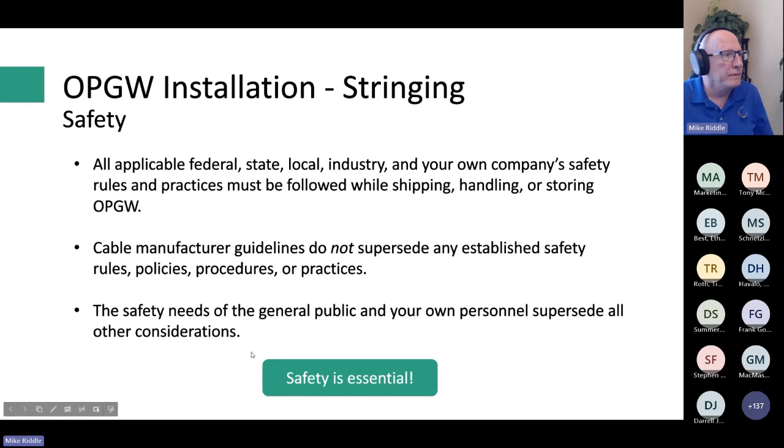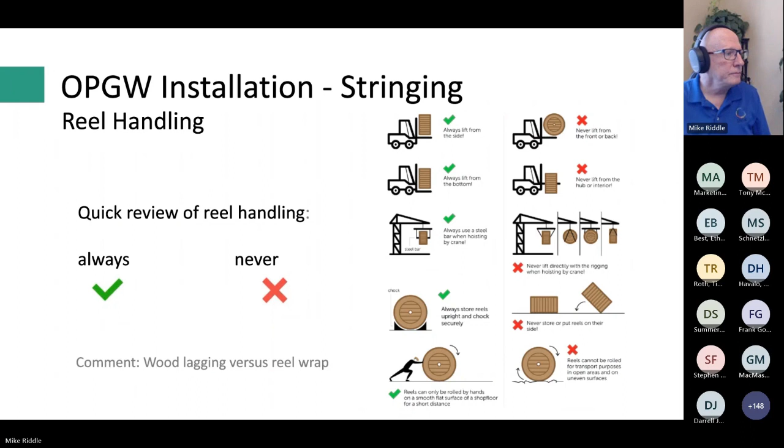So again, before you even begin the actual stringing, it's good practice to check the pull, because this is your last chance to make sure there was not some kind of potential problem. The general guideline for pulling in OPGW, and really this applies to other types of cable as well, but today our topic is OPGW, so I'm applying it specifically to OPGW, is 20% of the rated breaking strength of the cable. That's in the IEEE 524 standard, which is the standard for installing aerial cables, and it's the value that we use as well, 20% rated breaking strength. But you do need to check this, because some suppliers will only allow 15% rated breaking strength or less. I've seen 10.

If you exceed what the manufacturer is recommending, you risk voiding the warranty on your cable if something goes wrong. So that's your risk there. It's worth it to check it.

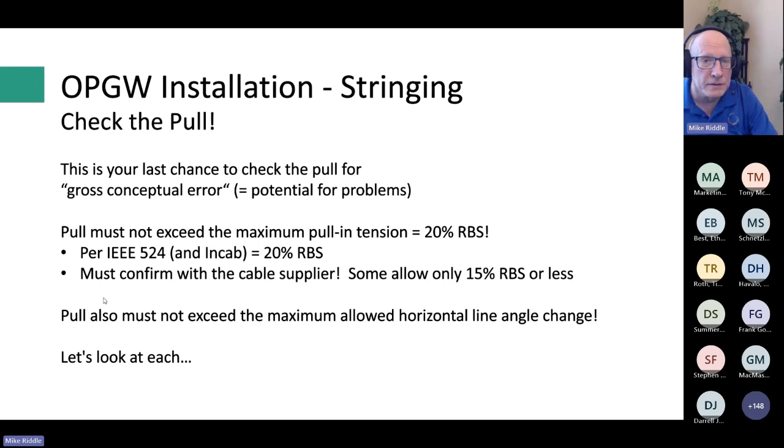We also think you should check the horizontal line angle changes, and we'll show how to do both of these. First, in order to do that, you need to know the rated breaking strength of the cable, and you're going to get that from the cable data sheet. This is one of our data sheets, but every manufacturer is going to have a data sheet on their cable, and you will find the rated breaking strength on it. If you don't have the data sheet, you need to get it from the cable manufacturer.

Later, we're going to see that the cable diameter is going to be a factor as well. So for stringing purposes, these are the two overwhelmingly most important things you need to know: the cable diameter and the cable rated breaking strength. So how do you check that?

In general, the tension at the payoff, from the reel, is going to be about half your design tension at 60 degrees Fahrenheit under initial unloaded conditions, what people often refer to as everyday conditions. Then the tension on the pulling side is going to be that tension divided by 0.98 raised to the n, where n is the number of structures you're going through.

So what does all of this mean? Well, this 0.98 raised to the n is allowing for the fact that each stringing block is going to add a little bit of friction to the pull. I'll use the term stringing block most of the time, but there's also sheave, pulley, traveler — different terms that all mean the same thing: the wheels that you're pulling the cable over as you pull it in during the stringing process. Each one of those adds a little bit of friction to the pull.

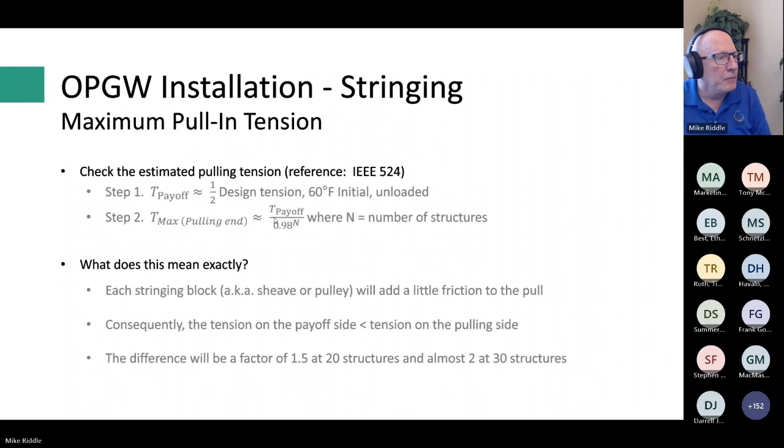As an example to illustrate this point: if I had a 19,500 foot pull going through 30 structures, and the cable rated breaking strength was 20,000 pounds with a design tension of 3,000 pounds, I would expect the tension at the payoff to be about 1,500 pounds — might be a little more, might be a little less. The estimated maximum tension using the formula on the previous slide: 0.98 raised to the n works out to 1.8. So 1.8 times 1,500 equals 2,700 pounds.

20% of my rated breaking strength was 4,000 pounds. 2,700 is less than 4,000, so you're okay.

Now, this is approximate. So what if this came out to 3,900 pounds? Well, you might want to be more careful because it's only an estimate — might be a little bit more, might be a little bit less. Just know that if it was 4,100 pounds, I wouldn't necessarily say you can't complete this pull. I'd say you need to talk to the manufacturer and be very careful during that pull. So it's a guideline, not some kind of law of nature.

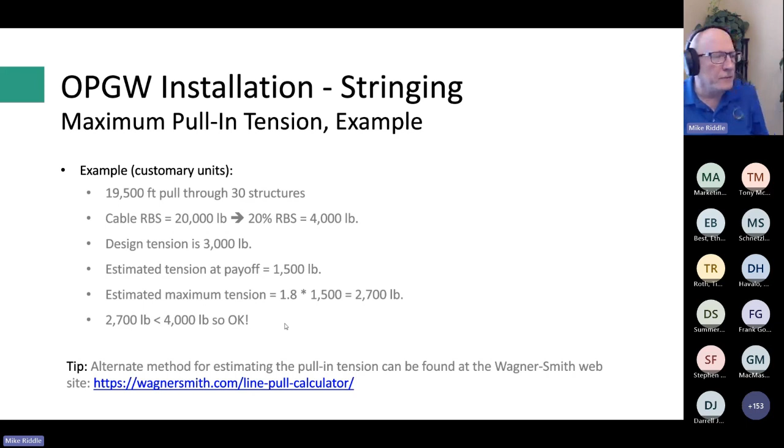Another way that comes at this from a slightly different angle but basically ends up in the same place: Wagner Smith has a line pull calculator on their website. You'll use slightly different information, but you end up in a very similar place as far as estimating what the maximum pulling tension is going to be.

And then I just want to repeat this for the metric units for our international customers. I won't actually read through this — just know that this is available if you want to look at the slides later and check the math and whatnot. Okay, so we'll keep going.

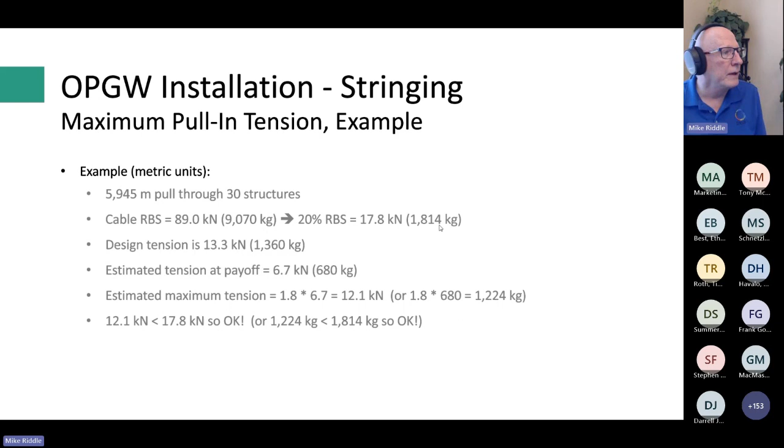I mentioned also that you want to check the horizontal line angle change. Our guidelines are for plain center stainless steel loose tube type cables, aluminum clad stainless steel loose tube type cables, and aluminum pipe type cables — basically any cable where the fiber is actually in the center of the cable. You want to limit your total horizontal line angle change to less than 270 degrees, of which only one can be more than 90 degrees.

For a stranded stainless steel loose tube type cable, you can go up to 360 degrees, of which two can be greater than 90. You can ignore angles less than 5 degrees. This too is another example of something that is a guideline, not a law. You need to check with other suppliers because they might be more restrictive, meaning these numbers might be lower, or they could be less restrictive.

To illustrate this, if I had a line using a type S cable with 10 degree angles, 10 times 10 is 100, that's less than 360, no problem. So that's the concept, you just total up the angles. You don't need to make a distinction between angles to the left and angles to the right. Just use the absolute value of the angles, add it all up, and follow these guidelines.

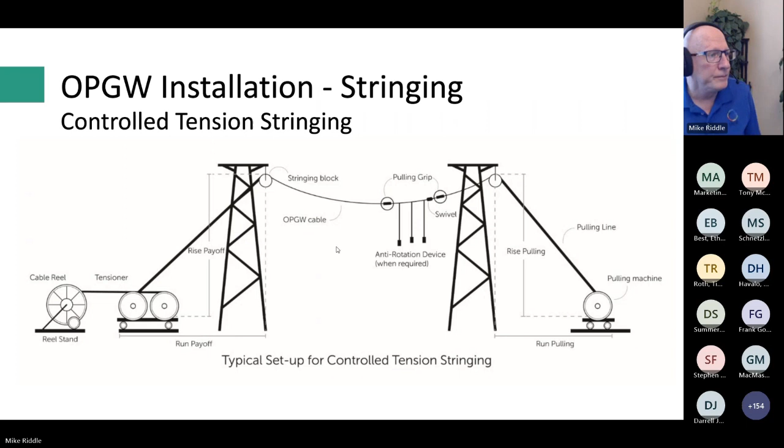I do tell people to use the mental, I emphasize mental, bloody hand test, because remember, we're about safety here. So you don't want to do this for real, you just want to use your mind to imagine that if you put your hand in the groove and that bull wheel was spinning, if you think your hand would end up bloody, then that's a tensioner not to use. You want your hand to come out clean, maybe a little dusty, but basically no blood. That's the point, but again, it's a mental test only.

We're also going to talk about the effect of lay direction, because in the United States and many countries, OPGW is made with left-hand lay, whereas conductor is made with right-hand lay. I just realized I should have had a slide to illustrate that.

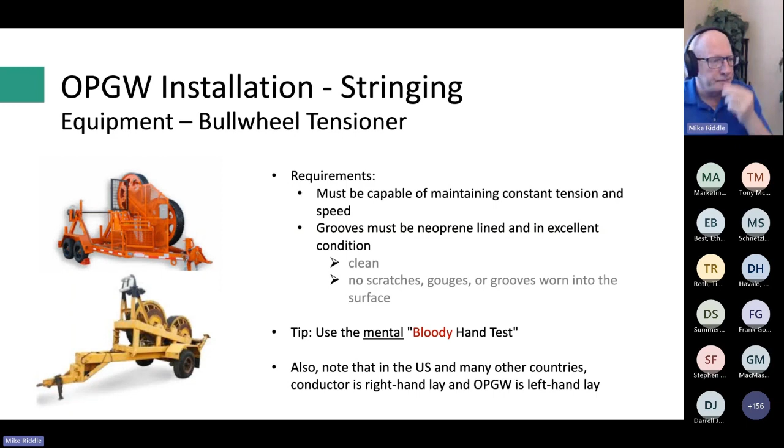But anyway, the point is that conductors in all countries are different from OPGW, they're the opposite. So outside the United States, you'll see conductor left-hand lay and OPGW right-hand lay. So in theory, here I'm illustrating right-hand lay conductor. The reeving of those bull wheels would be like you see here in this picture, left to right.

And notice the offset here. The back set of wheels versus the front set of wheels, there's a shift. Those front set are shifted to the left relative to the back.

So in theory you should change that from conductor to OPGW. Instead of going from conductor left to right, you should go right to left. Reading left to right, I wrote this wrong - offset to the right. Yeah, I made a mistake there. I should have said you should go right to left, and then the offset should be to the right. That part is correct.

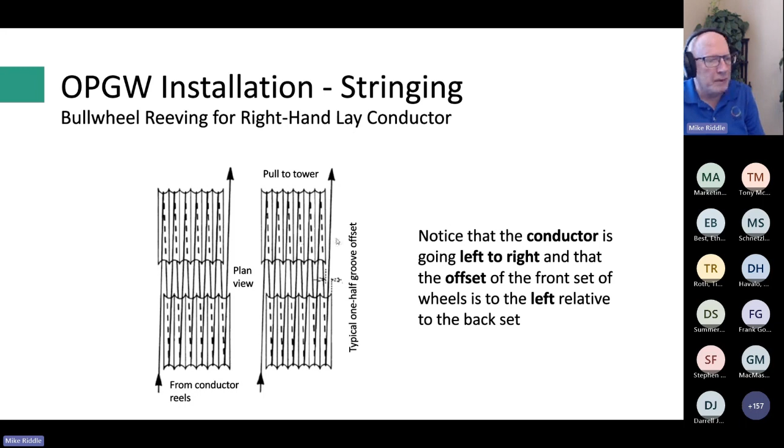And the reason you do that is that in theory you could get de-stranding, or think of it as unraveling - it's often called in our industry bird caging. So the outer strands could loosen up.

But we run into reality. In my experience, which is now going on close to 30 years, I've seen around 50% of tensioners, maybe more, where it's not possible or practical to reeve in the opposite direction. Sometimes you can't physically change the offset. Sometimes just the way it's laid out with the cable guides on the tensioner, you couldn't reeve it the opposite way. And in many cases, I've just seen the requirement is overlooked - the crew doesn't know that you're supposed to change it.

So I observed that over the course of my career, and I realized I've never seen an actual problem caused by the incorrect reeving or offset. I don't know why. It's one of these theoretical things, but I don't really see it in the field. It could be because of the materials used - aluminum clad steel and aluminum alloy wires used on the outer layer of OPGW.

They're stiffer than the type of aluminum that's used on conductor. So because they're less ductile, maybe they're less susceptible to unraveling or bird caging during stringing. But even on long pulls, I've never actually seen a problem from this.

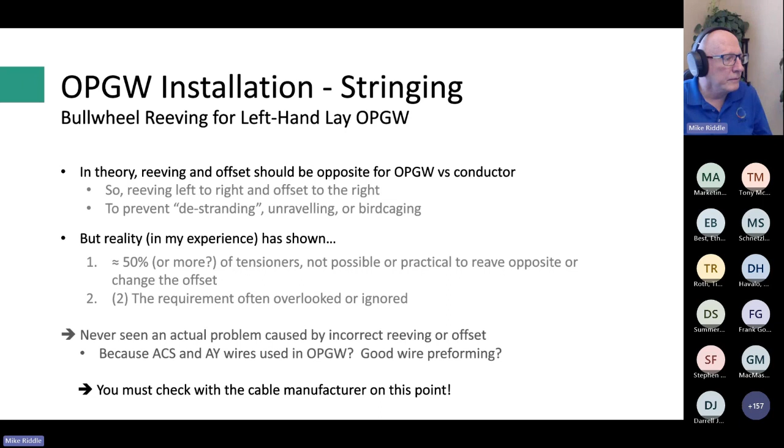You want the axle and the braking mechanism to be such that the cable will rotate smoothly. One of the things you're going to hear throughout this presentation is how important smooth is. You don't want the cable jerking around. You don't want the reel to free spin. So if the pull comes to a stop for any reason, you don't want the reel to keep spinning, because what's going to happen? The cable is going to loosen up.

If it loosens up too much, you can have a big problem. If it's only one or two wraps, maybe not a big deal. But if it's an entire layer, you're asking for trouble.

In order for it not to free spin, you should be able to get a little bit of back tension. Now, I've never seen a piece of equipment where you could actually measure that. People want to know, well, how much back tension? Well, 50 to 100 pounds. Okay, but how can you measure that? Well, you can't. So the reality is it boils down to hand tight.

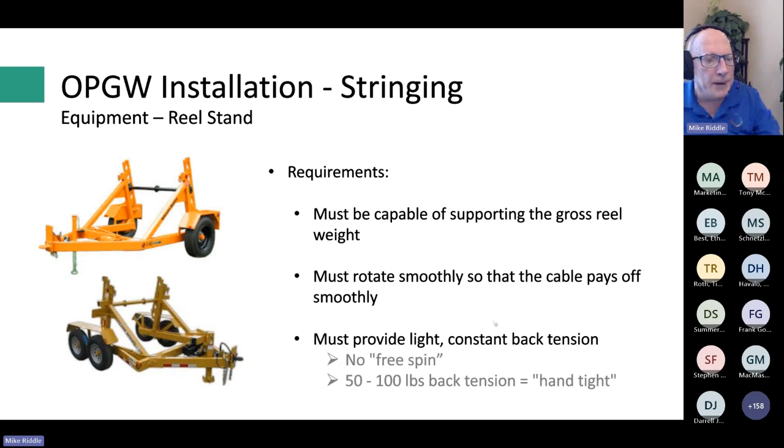Next up, the puller. The puller needs to have sufficient working capacity for the pull, so you've done that calculation of what the maximum pull is, and you want to make sure it's got that capability.

If you're looking at a pull that's going to require 3,000 pounds, then your puller needs to be capable of pulling 3,000 pounds. It's that simple. Also, you want to make sure the drum has the volume for the pulling line you'll be taking out as part of this process.

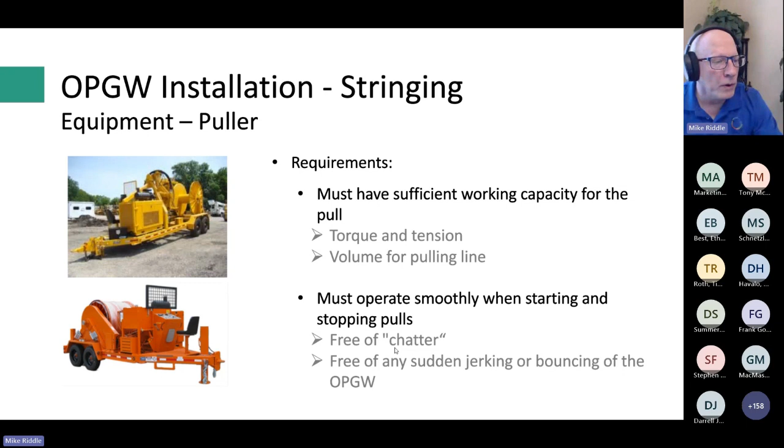And you want it to have good torque, so that's going to help make it smooth. You want it to operate smoothly when it starts and stops the pull. You don't want chatter, like it's jerking or working hard to get going. You want smooth.

So you had to connect the OPGW to a pulling rope. Let's talk about that. You want a good quality braided pulling rope or pulling line, close to the diameter of your OPGW, reasonably close. Obviously, sufficient strength matching the conditions of the pull. There's so-called uniline out there with no torque, and that's what works best—a no-torque type pulling rope.

I get this question asked a lot: what about using an existing shield wire to pull in OPGW? You can do that, but you need to carefully inspect it before the pull. These days, drones are a great way of assessing the condition of an existing ground wire you want to use to pull in another cable.

But there's also assessment equipment available. Kinectrics out of Canada has a little piece of equipment you pull along an existing ground wire—I think it works on X-ray—and you can examine the cable and see what condition it's in. What you're basically looking for is whether it's strong enough, or has broken strands, maybe from lightning strikes or corrosion, another problem that's weakened it to the point it could potentially break during the pull.

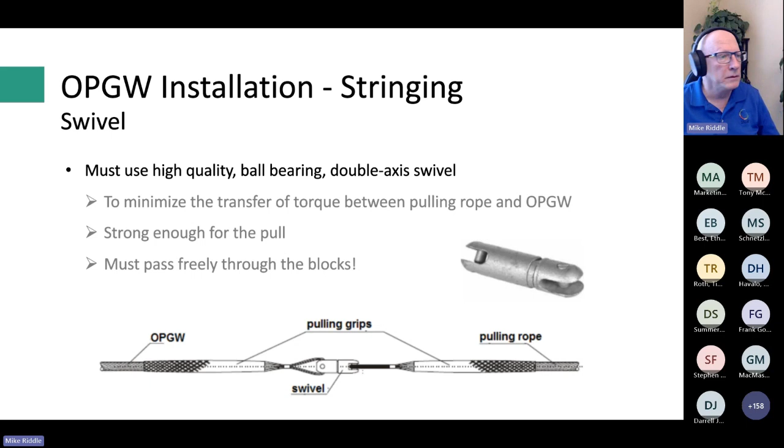Now, stringing blocks. Lots of other names for those: sheaves, travelers, pulleys, whatever. But these are the single most important tool used during stringing, and it's absolutely essential that they rotate freely with a smooth, clean bearing surface. Recall that mental bloody hand test I mentioned: if you would not put your hand in the groove of this block and have it spin for fear of it coming out a bloody mess, don't use that block.

Now this is actually going to be a little bit controversial, because most OPGW suppliers are going to tell you to use lined blocks, lined with neoprene or urethane. My experience has been that I've had much better results with unlined aluminum blocks than with lined blocks. Every time I've had pulling problems in my career, it's been with lined blocks, and every time the solution was to tell the customer to switch to unlined aluminum blocks. Again, that's my experience, other manufacturers will completely disagree. They'll say you must use lined blocks. I'm sorry, you have to check.

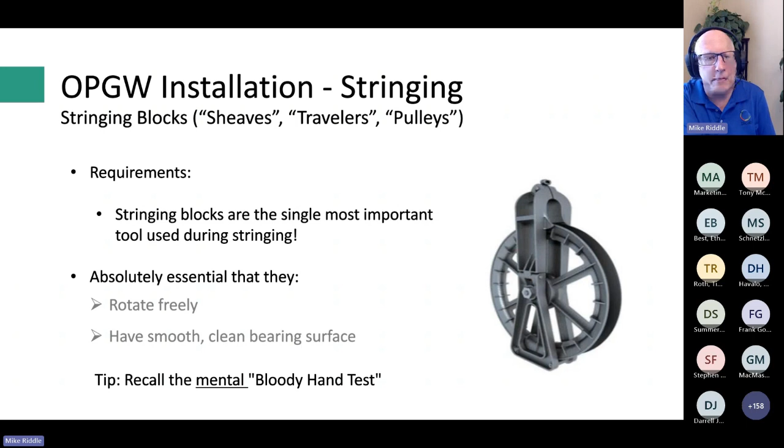In my experience, what happens is that OPGW is relatively light compared to conductor, so in lined blocks, the urethane or neoprene gives enough friction for the cable to ride up in the groove, and then bad things happen. If it rides up and starts dragging the cable along the frame of the block, that damages the cable. That happens when there are slight deviations from a true straight path, so even a little bit of an angle or offset can cause this riding phenomenon.

So for that reason, I tell customers I prefer unlined blocks. But regardless, you should never use unlined steel blocks. In general, those blocks tend to be too small anyway, it's another story, we'll come back to small sizes later. So my recommendation is unlined aluminum blocks are best, but you have to check if you're using somebody else's cable.

There's a newer type of block available from a company called Jameson. They have this Aerial Buddy block, and it's plastic, and those blocks are great, as my father would say, the greatest thing since sliced bread. They have a limited number of sizes, I think just two, 12 and 24. The 24 looks to me like the one that would work 80% of the time with OPGW. You've got to check though, again, sweat the details.

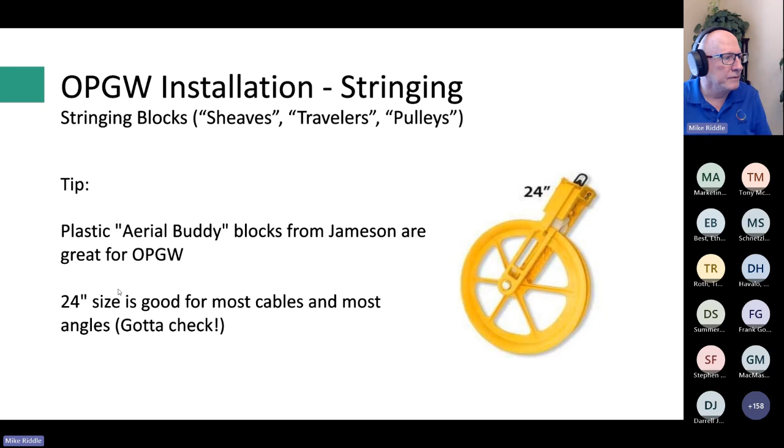So how do you size your blocks? If you have no other guidance, you'd just say 40 times diameter, which is what's shown in the IEEE 524, pretty sure about that. But you can get some relief: for the first, last, and any angles greater than 45 degrees, aluminum pipe type cable is still 40 times diameter, center stainless steel loose tube type cable also 40 times diameter, but a stranded cable you can get away with, and it'll work quite well, at 30 times diameter. For all other structures, the tangents in between, pipe type cable is 35 times diameter, same for center tube type designs, and stranded is 25 times diameter.

But some manufacturers are going to stick with 40 times diameter in all cases, so you're back to having to check. And 40 times diameter is always safe to use. Bigger, in this context, is better, you can always use a bigger block than a smaller one, as a general rule. But larger blocks create practical problems of availability and the difficulty of getting them hung, because they start to get really heavy, so mounting them can become a bit of a struggle.

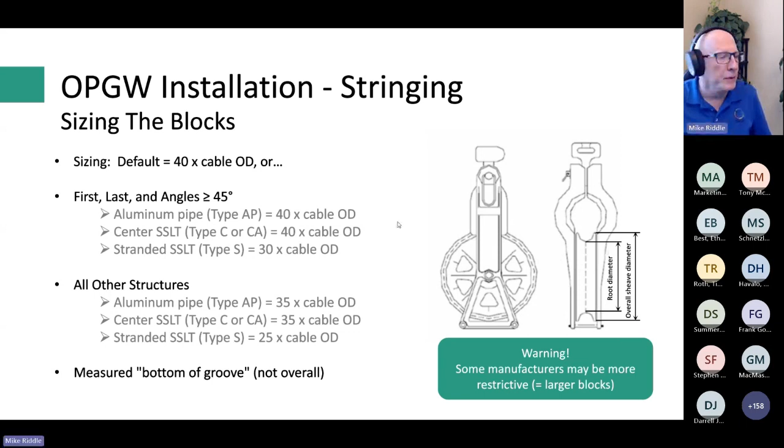Okay, with blocks you also need to support them at angles greater than 30 degrees. What you're trying to do is keep the OPGW in the same plane as the block. Because if you don't, what does intuition tell you is going to happen? The cable is going to tend to ride up and could then drag along the side of the frame. That's bad, so you need to support the block to try to keep the cable in the same plane.

You can do that with a support like a chain or a rope tied to the frame, like you see in this illustration, secured above the block, or you can support from beneath the block. Because of this situation, what you're generally going to want to do is have the block above the plane of the cable prior to the pull, so that when the tension comes on, the cable pulls up and ends up in the same plane as the block.

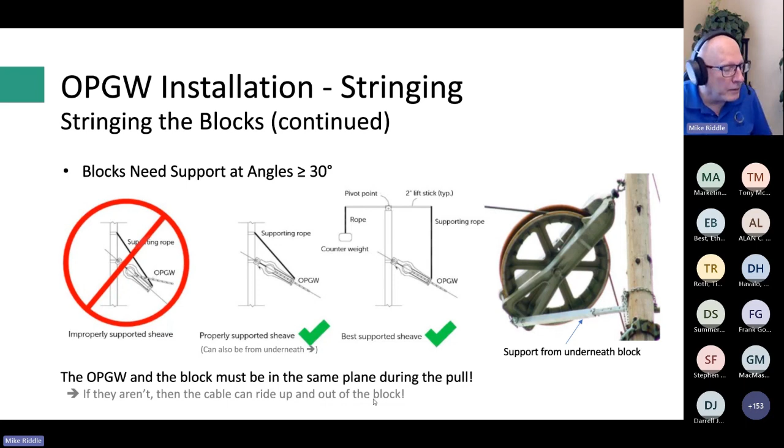This system here, you can rig up something so that the block can float a little bit. That's ideal - you get bonus points for being fancy and cool there. But I've only seen one utility who does something like this. Again, what you're trying to avoid, or at least minimize the possibility of, is the cable riding out of the groove and then dragging along the frame of the block.

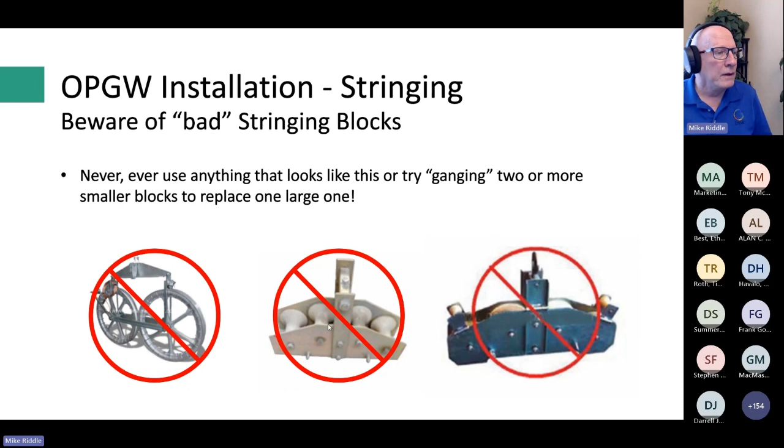This is a so-called banana block. Absolutely no good. I have seen this type of block wreck more OPGW, and even some ADSS cable, than anything else out there. And this is a variation of this banana block concept. It does not work. Here's why.

You need to have a certain bearing surface over a block. So if this is a block and the cable goes over it, it makes contact with the block and then continues over the surface of the block before it breaks that contact as it's continuing on. That area I refer to as the bearing surface of the block.

You can do this geometrically, you could also do this mathematically. If you have a certain size block, and then you add two of them, the total bearing surface just ends up being divided across those two blocks. It doesn't get more bearing surface. And if you do 3 blocks, you just divide it across 3, but the bearing surface is still the same. So if this original bearing surface is not sufficient, then it doesn't matter how many blocks you use, it's still not sufficient because of this reality.

So you've got to use a block that's the proper size. There is sort of an exception, because sometimes the way a tower is designed, maybe the cable for some weird reason is going through the middle of it - it's related to structure design. Sometimes you need a block on one side of the structure and a block on the other side of the structure. So you are using 2 blocks, but they still have to be the proper minimum size. If I work out a block and it's supposed to be a 14-inch root diameter - root diameter is critical - then I need a 14-inch on both sides of the structure. I can't use a 12-inch on both sides. So I hope I'm making sense there. Even in this situation, each block must have sufficient bearing surface, so each has to be the proper minimum size.

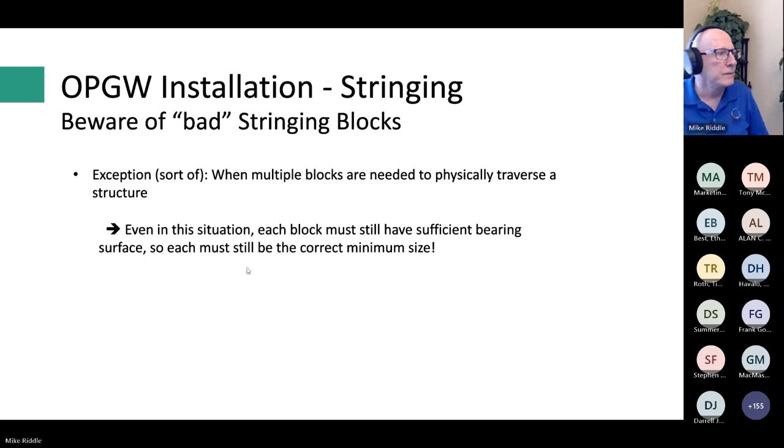Okay, next up. So we've basically talked about the tools and equipment for doing the stringing. After you complete the stringing, you've got to do the sagging. You've got to bring the cable up to sag, and then you got to do your clipping in, and you'll need a completely different type of grip for that.

That works too, and this is a case where there are trade-offs. Pocketbook type grips are more expensive. They're around $500 each, and you need to plan for a couple, 2 to 4 weeks to get them.

Pocketbook grips are generally sized for one diameter only. So if you've got a cable that's 0.5 inches, you have a pulling grip, a come along for 0.5 inches. If you use a second cable that's 0.6 inches, you've got to have a completely different grip for that. It can be used indefinitely, that's good. You can keep using it.

Well, I mean, other things too. The bail has to be good, the bolts have to be in good shape. But basically, as long as it's in good shape, you can keep using it.

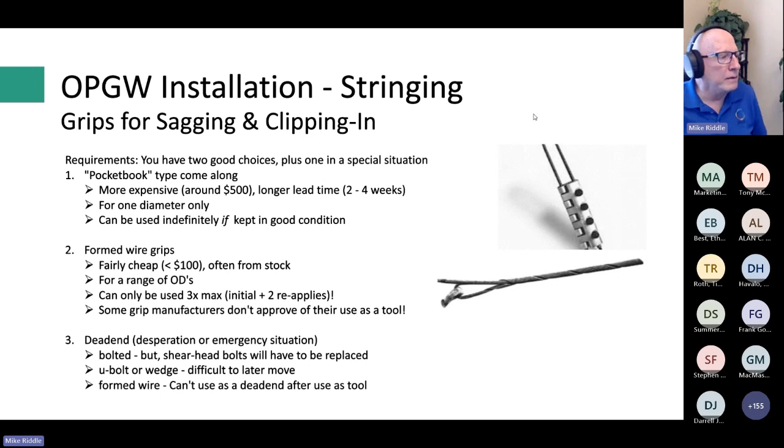A formed wire type dead end, an actual dead end as opposed to a grip, or a formed wire dead end designed for OPGW, you could use that, but then once you've used it as a working tool, the manufacturer is going to tell you it's no longer good for use as a permanent dead end. The reason is that part of its holding strength comes from grit inside the formed wire part of the dead end, and you'll lose some of that in the process of using it as a tool. So it won't be able to develop full holding strength, which is why you can't then use it as a permanent dead end.

Anti-rotation device, when do you need that? For aluminum pipe type cable, you should always use an anti-rotation device. For your center stainless steel loose tube type designs, whether it's one with an aluminum pipe or aluminum cladding or just a plain steel tube, above about 15,000 feet or 4,500 meters, you should use an anti-rotation device. And type S cable, not required.

Now, these are our guidelines. There are other cable suppliers who require an anti-rotation device on all of their cables. And because suppliers recommend different dimensions and weights for the anti-rotation device, you're in the situation where you have to check. You have to find out what your particular cable manufacturer's recommendations are.

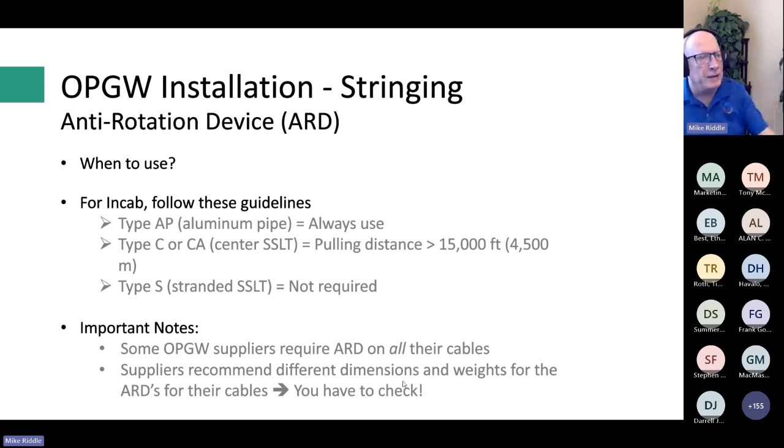There are commercially available ones, and they're okay by Incab. Again, you have to check with the cable manufacturer what they're going to allow, because here you see, if you total up what the weight of this is, it's what we would approve, but another manufacturer might want the weight to be different. So again, you've got to check.

The setup is also important. Every supplier has a recommendation for run versus rise. We allow 1-to-1, so if my tower is 100 feet, the bull wheel tensioner should be 100 feet away from the tower. But some suppliers want more, 3-to-1, so for 100 feet they want 300 feet. That's significant and affects your setup. Some suppliers even say 4-to-1, so you've got to check.

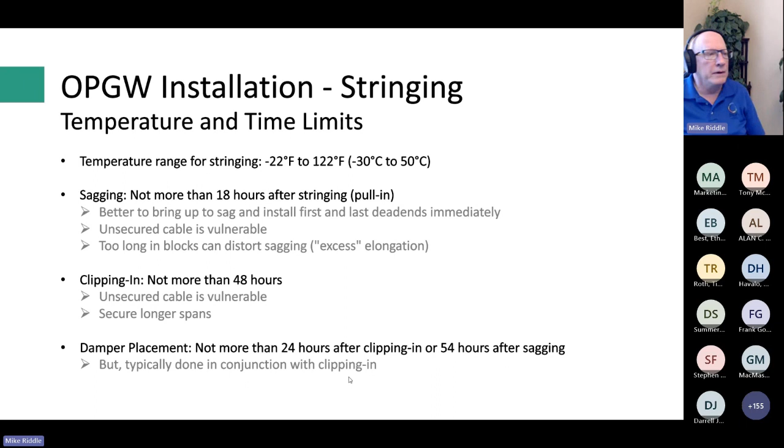What about dampers? Well, 24 hours after clipping in, or 54 hours after sagging. Usually that's going to be done in conjunction with clipping in anyway, but again, people want guidelines, so here are some guidelines that are good ones to use.

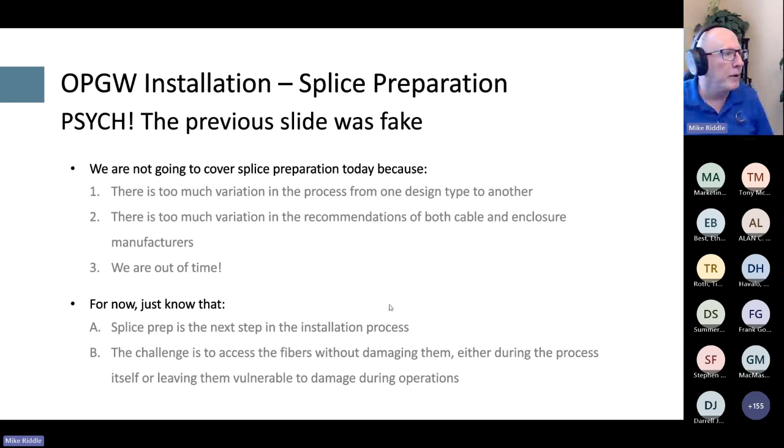So we have completed talking about stringing. Next up is splice prep. But that's actually just a fake out, right? We're not going to talk about splice prep because we're already out of time. There's too much variation from one design type to another anyway, and the recommendations from cable suppliers and enclosure suppliers vary too much too. Just for now, know that that's the next step in the process. The big challenge is to access fibers without damaging them when you're doing it, or leaving them vulnerable to damage during operation. So we are finished, and we're actually a little bit over time.

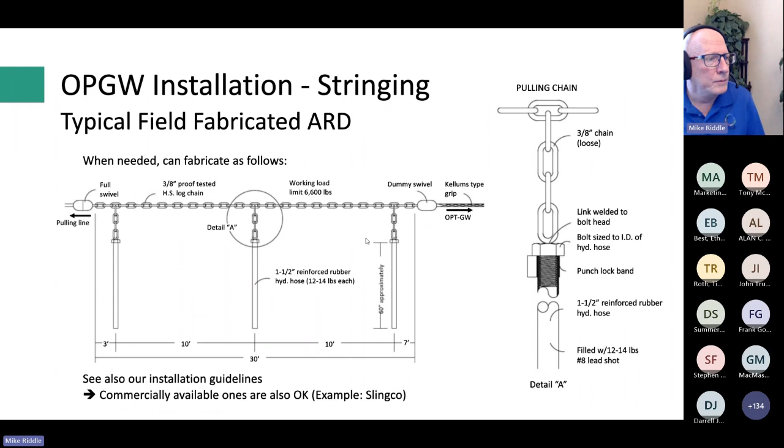Actually, I think it's even better that the cable — any consequence of that tension, like a pull down effect — has more bearing surface when the rise to run is 1-to-1 versus it being, say, 3-to-1. So I've not really understood where my competitors have come from on this particular point, and I'll fall back on my experience. What we recommend has worked well over the course of 30 years.

So in terms of that estimate you use for estimating the maximum pulling tension, you're effectively ignoring any effect from that. It's effectively assuming the friction of the block is the friction of the block, regardless of how much of it is engaged with the cable. That might not technically be true, but in reality, it works good enough.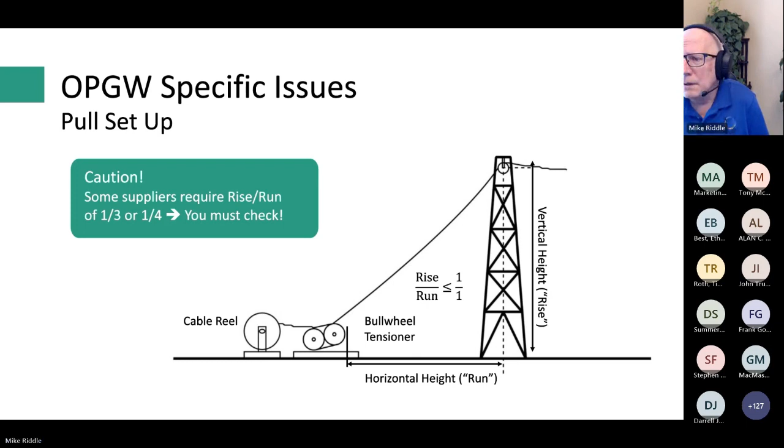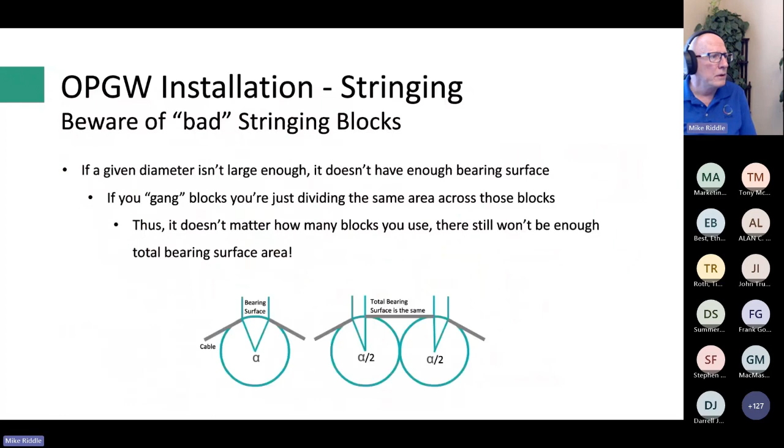The way the accessories work, most suspension units are good for up to 30 degrees. Then you'll have a double suspension that's good for up to 60 degrees. After that, you can do a running dead end, where the cable is dead ended but not spliced. So if you go back to those guidelines I gave you before, closer to the beginning of the presentation, I'll go back... angles.

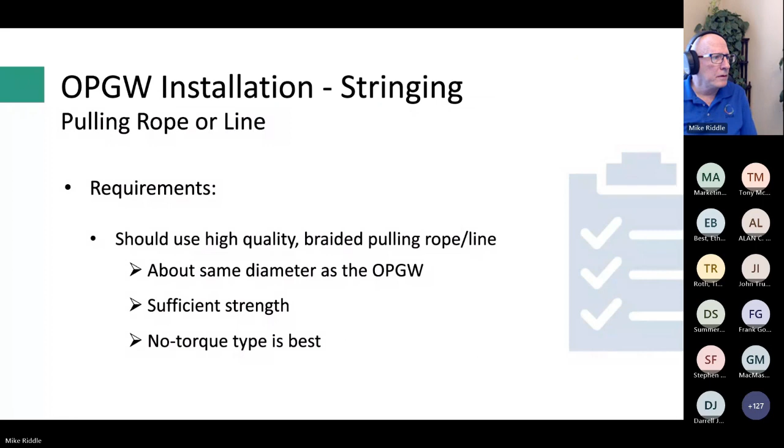Do you see any issues with installing dampers, anti-galloping devices, or aerial FAA marker spheres during the pulling operation as opposed to installing them after the OPGW has been sagged and clipped in? Well, I just don't know how you would practically do that because the cable is moving through, and if you installed a damper or an anti-galloping device or a marker ball especially, they're not going to pass through blocks later on. I mean, if you happen to be doing them on the last span, or if you want to do them when you're doing the last span, I don't see any problem with that at all.

But you'd have to plan accordingly. I don't have the capability of illustrating what I mean here. I hope you understand me, but if you don't, you're welcome to follow up with me afterwards and I could illustrate what I'm trying to explain here. But in general, on span 1, I couldn't put vibration dampers because they won't pass through the block to get to span 2. So you limit the ability.